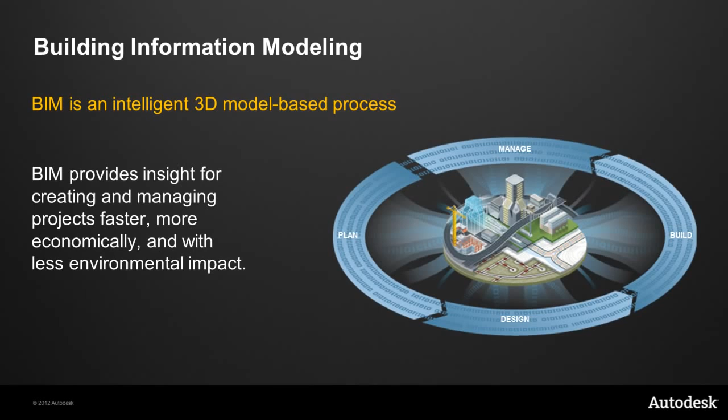BIM starts with a 3D model, but it's more than that. It's intelligent 3D. The model from a BIM design process not only represents the design, but also contains the underlying information, data about the objects in the design such as type, size, material, and so on.

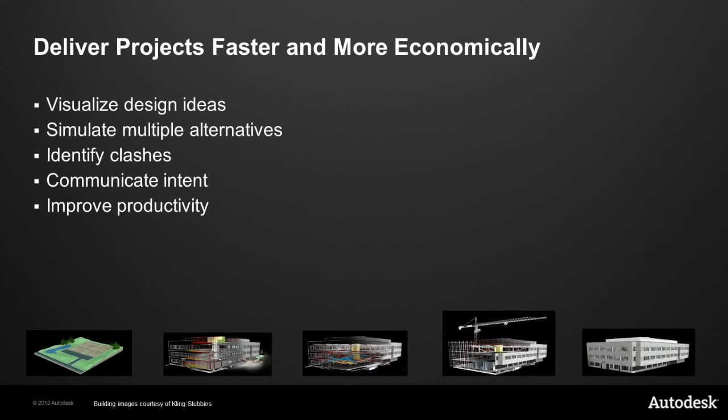What makes Autodesk BIM solutions really exciting is what you can do with the information within the model. Win more work and build stakeholder approval more easily using powerful visualizations. Simulate multiple construction alternatives more quickly and accurately. Keep documentation accurate no matter how many times the design changes. Reduce cost and time by identifying costly design conflicts virtually before construction begins. Improve team collaboration and more easily manage project data across extended teams and external partners. And finally, provide a valuable digital asset to the project owner for operations and management.

BIM is transforming the global AEC industry. BIM is helping AEC professionals and owners in every segment of the industry to realize benefits at every point in the project lifecycle.

We are now seeing BIM go far beyond the building model to infrastructure design, concept studies, community reviews, construction trailers, and facility maintenance training. The shift to BIM has firmly taken hold, and firms around the world are already seeing

returns from their investment. In the 2009 and 2010 McGraw-Hill Business Value of BIM surveys in the US and Europe, firms cited better construction outcomes, reduced errors and omissions, reduced rework, and winning and retaining business as key benefits.

The rich information available through BIM provides ability to plan more effectively, design more intuitively, build more accurately, and manage more efficiently.

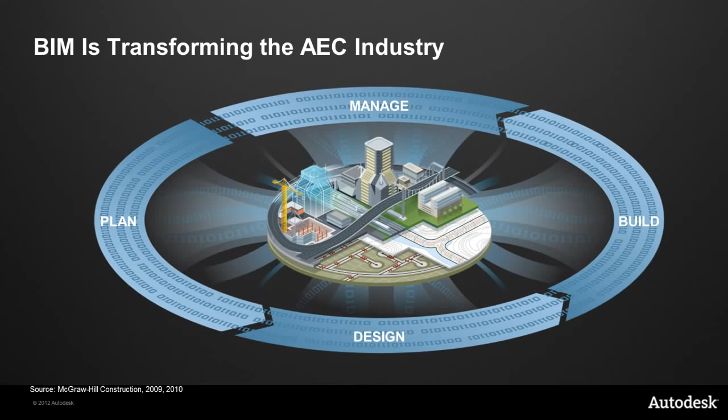When you execute work, there are a number of common elements, and at the center is the project, the organizing element tying everything together. By putting a model at the center of your project and gaining additional levels of information, creating a building information model, you'll gain deeper insight into the project's costs, schedule, and constructability.

Connecting the processes and technologies you're already using today, you can drive a much more efficient and less risky execution of project work. With more information, you work smarter, make better decisions on how to execute work across all areas.

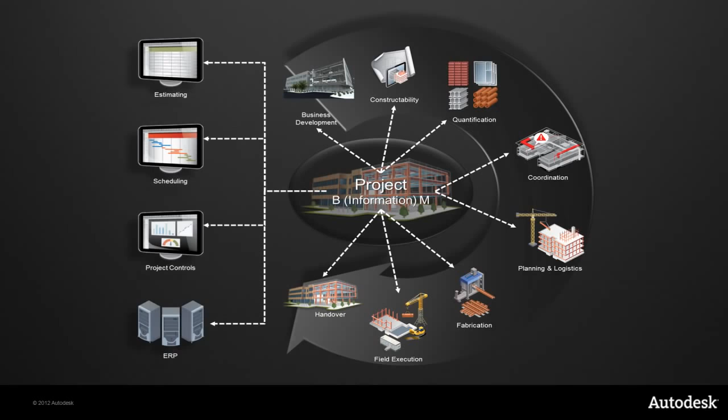So now that we have an understanding of the challenges we all face in today's market, and understand how BIM can help construction firms navigate those challenges and be more profitable and efficient, let's now take a look at how to implement BIM in your firm and provide sound tactics for ensuring you get a return on your investment the first time and every time you execute a project using BIM.

Before any plan can be developed, it is very important that we gain executive or top-level support for the implementation of BIM. This may seem obvious, but is a step many firms skip or do not emphasize enough.

As we mentioned earlier, BIM is a process that enables some great benefits both in efficiencies gained, but also money saved or profits earned. To that end, it could and will be a change for many people in the firm in how we go about winning, planning for, and executing our projects.

Thus, we will need the support of decision makers in our firm when difficult decisions need to be made or costs need to be incurred that may or may not have a direct effect on the current project.

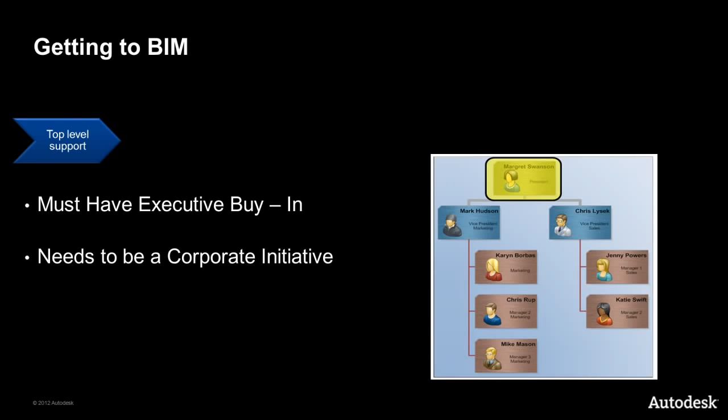The decision also needs to align and tie into the business goals of the company. This will further ensure that it has the support of the organization because the success or failure of the implementation can be directly tied to the corporate goals and initiatives.

Lastly, but just as important, don't do this alone. There are resources available to firms who are taking this step, whether it is a local Autodesk certified partner or other consultants who do these implementations every day.

The point is, leverage these resources to ensure you have the right talents and capabilities at hand, when you need them, and in the amount you need.

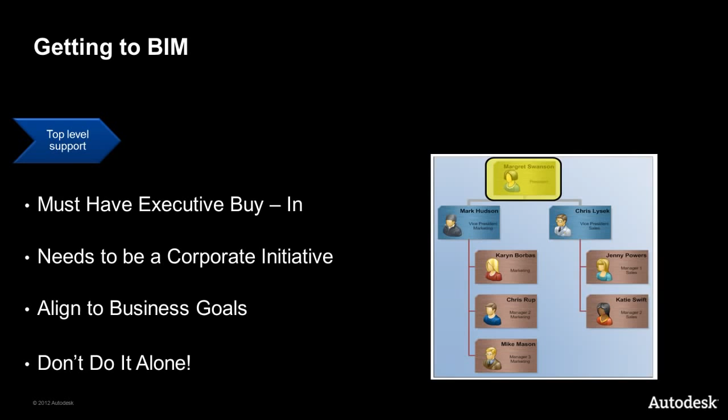Once you have the top-level support and corporate buy-in, now it is time to actually create a BIM plan, also known as a BIM execution plan.

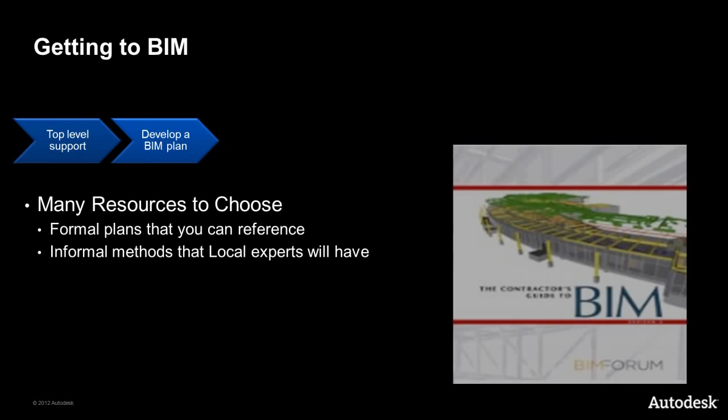Again, there are many resources out there that provide the framework needed to create a plan. Many go into a great depth of detail, with flowcharts and diagrams in template form to leverage for planning, while others are more high level and simply provide guidelines.

Also, the authors vary just as much. Penn State, Indiana State, and many other academic institutions provide documents born from many years of theoretical and practical research. Industry organizations such as GSA, ASHRAE, and the AGC also have their own plans that can be leveraged.

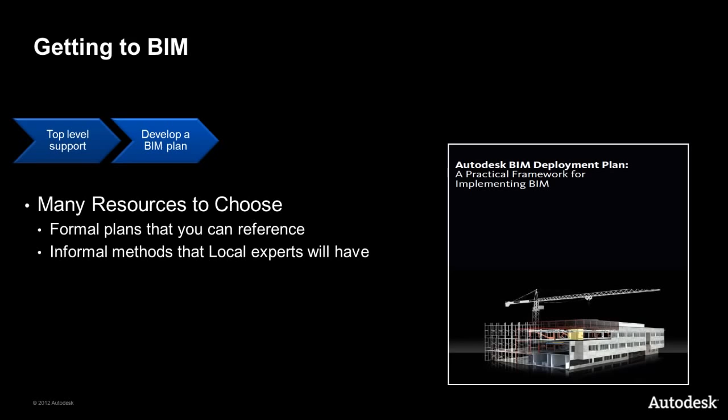The local resources mentioned earlier will also have versions of plans that they have developed through experience in working with other firms. They all have one thing in common: have a plan and use it.

Next, and also very important, is that we need to define what success is for you and your firm. This may seem obvious, but it is important that this be specific to you and your firm's capabilities, the types of projects you execute, and ties back to the corporate goals we discussed earlier.

It is also important that we do not do too much the first time. I have personally been involved with many BIM implementations, and I have seen some that have failed.

The ones that have failed have several common elements: not having a plan, having a bad plan, or having a plan that had no definition of success or failure. This is where defining the success will really help avoid these pitfalls.

An example of selecting attainable goals and measurements of success would be to limit the first use of BIM to a specialization, or something that you can control easily.

For example, if a general contractor self-performs the MEP system's installation, then that would be a great place to focus the BIM use on, and something that can be easily measured within the context of the project, i.e. reduced X number of RFIs with duct and steel coordination by leveraging a BIM, etc.

In comparison, the opposite might be use BIM for an entire project. In this example, what and how will the information model be used? And how do we measure if it was successful?

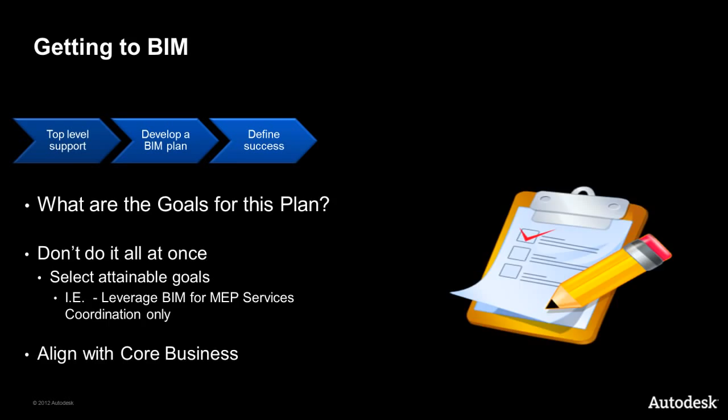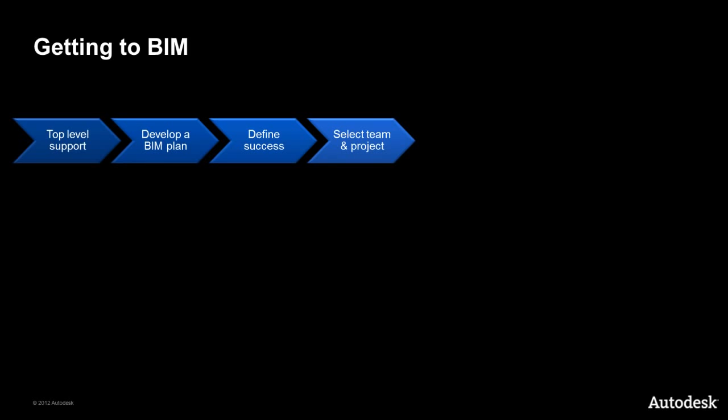Now it's time to select a team. This is equally as important as the previous steps, as it is where the rubber meets the road for our project. These will be individual contributors who will be responsible for executing the plan most.

Here we want to search for individuals in your firm that are eager and willing to participate. Nothing will derail an implementation faster than a personality on the team that is set in their ways and is not open to the changes necessary for BIM to succeed.

We also want people who are willing to share their experience and learning, to be the champions of the process moving forward. By doing so, you can create a snowball effect. Once other teams see how these folks are succeeding and the experiences are shared, they will want the same and will be eager to try and leverage BIM on their projects too.

It is also a good practice to align the professional goals of these individuals with the success of the BIM execution plan or the use of BIM on the project. This way they are both professionally and monetarily motivated for its success.

Project selection is also important. We want to select a project that is typical for the type of work your firm does. This way the practices and lessons learned from the first project can easily be applied to all future projects.

Conversely, avoid selecting a one-off project, something you happen to win and are executing, but diverges from the core values of the firm. Although these are great projects to have, especially if you are moving that core value towards something new, they are not the best candidate to implement BIM for your first time.

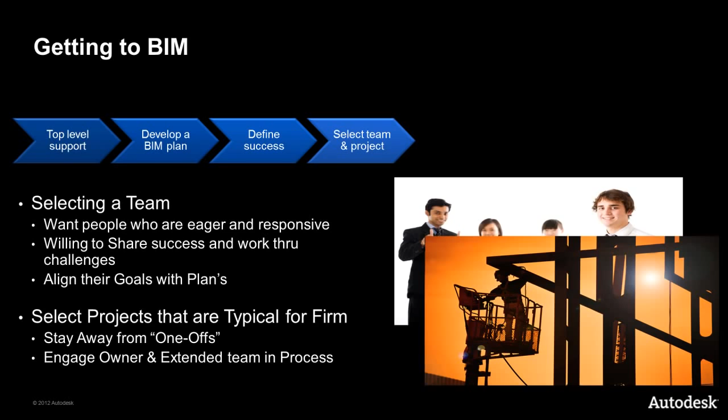Lastly, but no less important, engage all of the parties involved and make them part of the planning and execution process. Make sure the owner is aware of how and why you are using BIM, assuming they aren't the ones who required it in the first place, as well as the extended team with subcontractors and other trades and consultants involved.

The simplest step in the process? Put the plan into action and start work using BIM as the plan dictates.

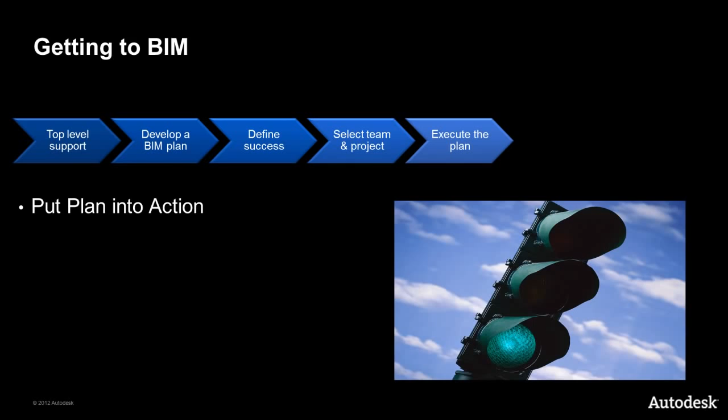As you are executing, it will be necessary to make adjustments as we go. It is unreasonable to think that we got all the contingencies and options laid out in our execution plan. And it is also unreasonable to be so rigid in following the plan that we cannot make changes as needed to avoid issues. It is important to realize that the plan won't be perfect the first time, and that it will need to be flexible.

But at the same time, we want to stick to a plan as much as we can, and thus making adjustments or course corrections as we go is key.

We also need to document the changes that we made, and document why they were made. This information will be critical in later stages, as we'll need to understand why decisions were made, and if the change could be a permanent one, or was due to circumstances that were specific to the project or other situations that will not exist beyond this instance.

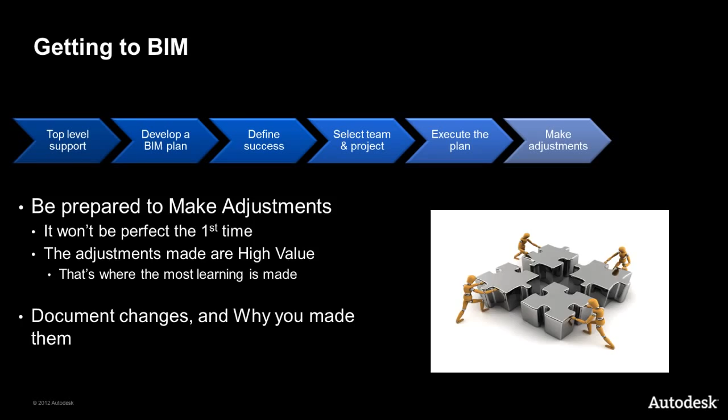Lastly, we need to take what we have learned, revise the plan accordingly, and expand the implementations. This expansion could be just in scope of how BIM is being used on the project, i.e., use it on the next phase or an additional service, or can be expansion within your firm to start executing other projects with BIM.

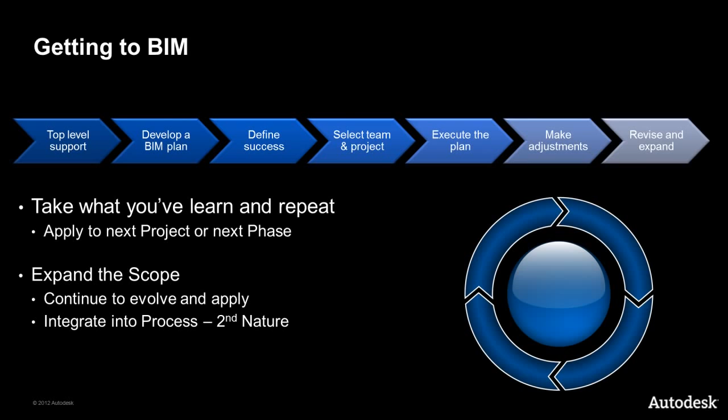In conclusion, we hope you came away from today's Implementing BIM for Construction Lead the Way virtual event with a better understanding of what the industry challenges are today, what BIM is and how it applies to the construction industry to meet those challenges, and a clear process for implementing BIM in your firm.